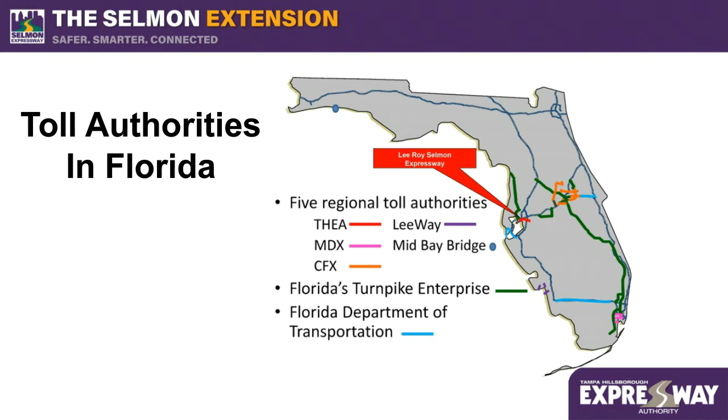So exactly what is THEA, and how are we different from the Turnpike or FDOT? We are an agency of the state created to build and maintain roads in Hillsborough County and any county that borders Hillsborough. Because we are an agency of the state, we have to follow all of the procurement rules and obey the Sunshine Law like any state agency.

We have a local board, so that allows local authority. We have a 7-member board: 4 are appointed by the governor and confirmed by the Senate, 2 are elected by the voters of Hillsborough County, the mayor and a county commissioner, as well as the FDOT district secretary. FDOT and the Turnpike are state agencies with headquarters in Tallahassee.

THEA is financed strictly through the tolls we collect. We receive no tax funding, and the tolls that you pay on the Selmon Expressway stay in Hillsborough County. FDOT and the Turnpike put all of their tolls together and then redistribute them throughout the state.

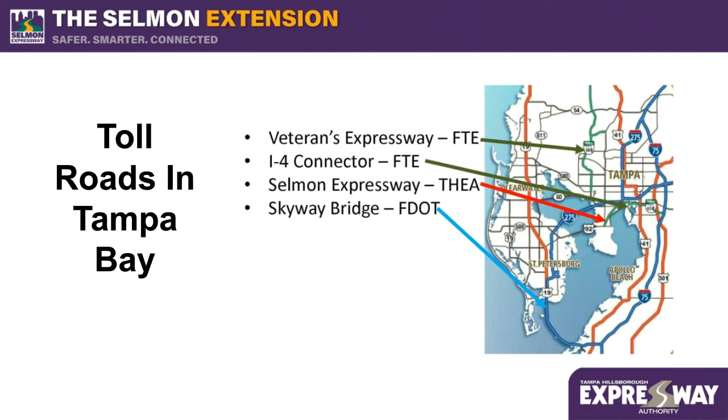THEA owns 4 properties, the primary of which is the Lee Roy Selmon Expressway. It runs for about 15 miles from Brandon to Gandy Boulevard in South Tampa, and with the extension project, we will be adding about 2 more miles.

Brandon Parkway and Meridian Avenue are feeder roads for the internationally award-winning reversible express lanes of the Selmon Expressway. In addition, Brandon Parkway and Meridian Avenue are multimodal, as they have bicycle and pedestrian paths. In fact, I think Meridian Avenue is the best-looking road in downtown Tampa. We also own the Selmon Greenway, a 1.5-mile urban trail, mostly in the shade of the expressway, that runs through downtown Tampa from the Riverwalk on the west to Ybor City on the east.

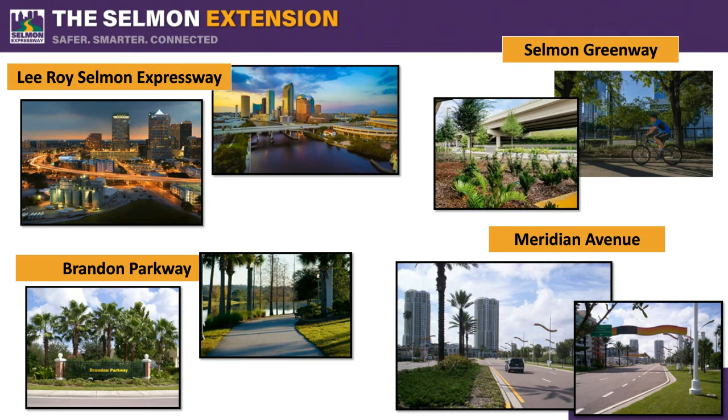As a local authority, we are part of the community, and part of our mission is to give back to that community. Some of the projects you see here are the Swan Avenue Underpass.

We cleaned and painted the walls and pier columns, added a coating that will make it easier to get the graffiti off, and installed a great deal of landscaping, lights, and a bigger sidewalk for pedestrians, strollers, joggers, and bikes to traverse this walkway under the overpass.

We also partner with the city to light the Selmon Expressway over the Hillsborough River. If you've ever been on the Riverwalk at night, you know that those bridges look very cool with their changing lights. Our last public art is right outside our building with our Tampa Play mural by celebrated Tampa artist Bask.

And finally, the Kotfila Memorial Dog Park, honoring a true hero, Deputy John R. Kotfila Jr., who gave his life to save another from a wrong-way driver on the Expressway in 2016.

I just wanted to give you an idea of what the Expressway Authority is and what we do for the community. And now, on to the Selmon Extension.

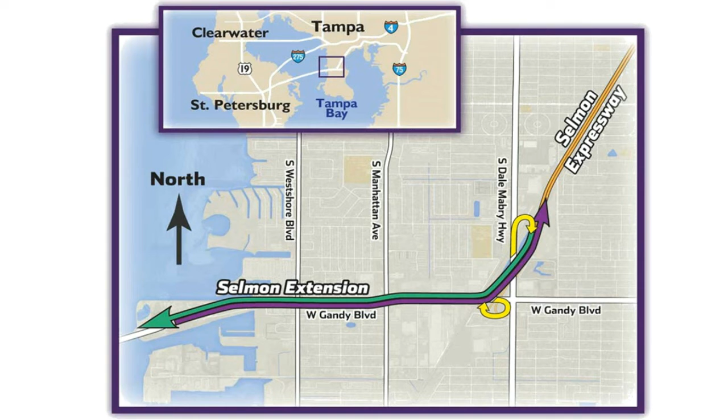Let's talk about some of the details of the project. The bottom of the bridge is 30 feet above the existing road. Typical downtown bridge structures are around 17 feet.

This helps keep the cross-corridor visibility on Gandy Boulevard. In other words, if you're on Gandy Boulevard, you'll be able to see what's on the other side of the street. The turning movements that were on Gandy Boulevard at the start of our project will remain. While we may need to make modifications during construction, the turns that were there when we began will be put back at the end of the project.

The extension is 1 lane in each direction. We estimate that approximately 40% of the traffic on Gandy Boulevard today is regional traffic. That means that we only need 1 lane in each direction to handle that volume.

The construction on Gandy Boulevard is happening totally in the median. While this is great for businesses, we aren't closing any business driveways. It is a tight working space. So please, if you're driving Gandy Boulevard, don't speed and watch out for our workers.

Our contract calls for no lane closures on Gandy Boulevard or the Selmon Expressway during the morning and afternoon rush hours. Typically, the work along Gandy Boulevard is being done at night and on weekends. The work on the interchange is being done during the day.

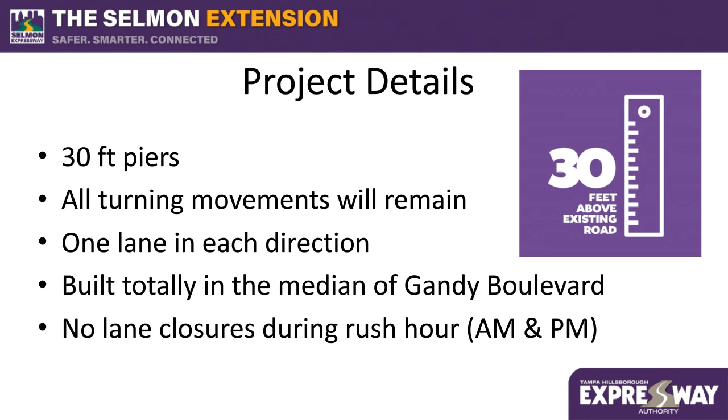The Selmon Extension Project is funded completely by the Expressway Authority. No tax dollars are being used. It is funded with toll revenue and bonds, and our debt is not state debt. The toll collected on the extension will help pay back the bonds, and the cost for the project is expected to be $230 million. The extension project did not acquire any right-of-way. No property purchases were required from any businesses or homes. The toll for the extension will be 94 cents for SunPass account holders.

The immediate community and region will benefit from the increased ability to move goods and people around the Tampa Bay region. The project will provide better travel times and safety in the Gandy corridor, and it will provide a major evacuation enhancement for both South Tampa and Pinellas County families. And all of this is completed without taxpayer dollars.

We put together an animation of the extension, so let's look at that now.

The Selmon Extension is a key component of Tampa Bay's transportation system. The extension will complete the Selmon Expressway's uninterrupted connection from Brandon across Tampa to the Gandy Bridge. The extension will consist of an elevated expressway in the median of Gandy Boulevard, with ramps to enter and exit the extension just east of the Gandy Bridge and at the intersection of Gandy Boulevard and Dale Mabry Highway. Traveling east from St. Petersburg, drivers can choose to stay on Gandy Boulevard for local destinations or enter the extension via the on-ramp to the left.

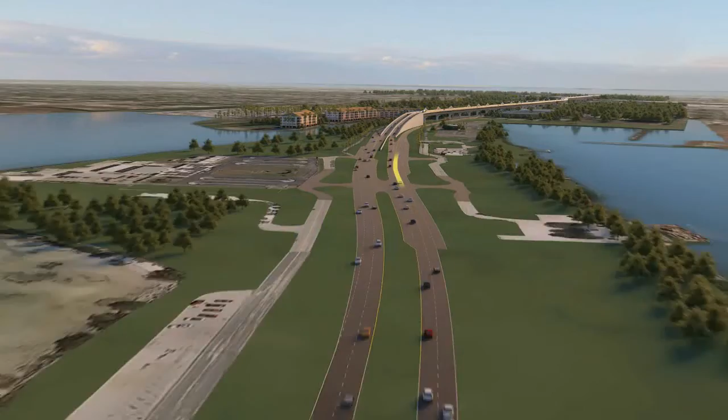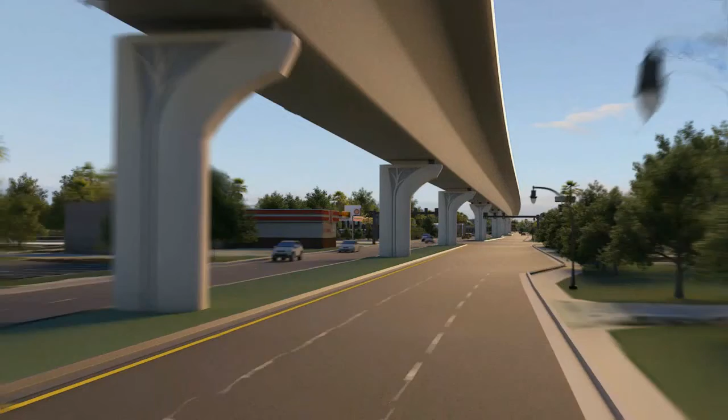Once on the extension, eastbound travelers have the choice to exit at Dale Mabry or continue on to the Selmon Expressway towards downtown Tampa. The bottom of the extension structure is 30 feet high, approximately twice as high as a typical bridge design. This maintains sight lines for businesses and cross streets. When the extension is complete, the current turn lanes will remain as they are today.

Pier design, decorative lighting, and public art opportunities are part of the project. Eastbound travelers along the extension have the choice to exit at Dale Mabry or continue on to the Selmon Expressway. Travelers along Dale Mabry will be able to enter the extension via the ramps just north of the Gandy Boulevard-Dale Mabry intersection. Traveling west on the Selmon Expressway, drivers can choose to use Gandy Boulevard or to continue on to the extension.

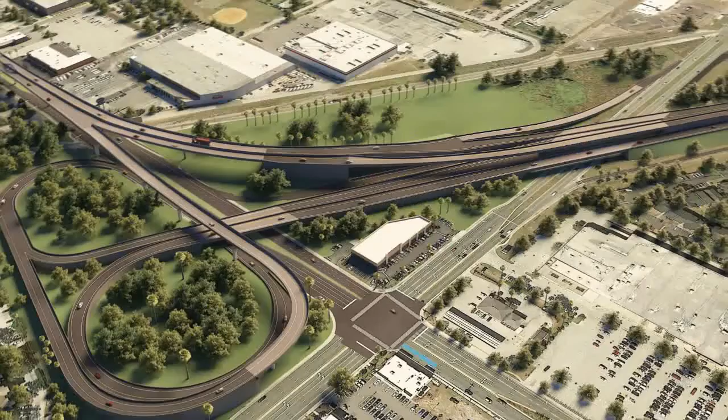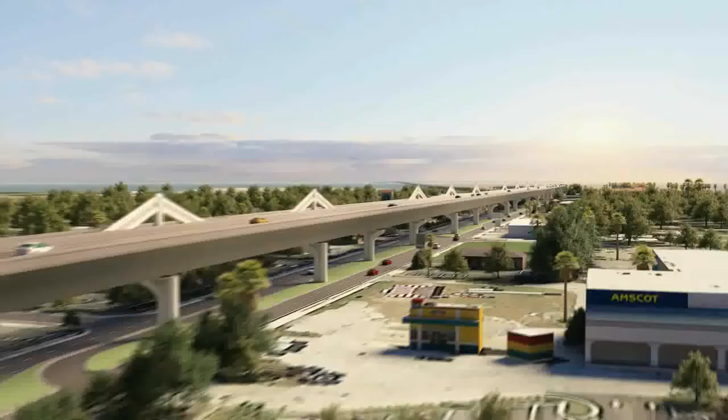Trucks will be allowed on the extension. This will provide a direct route for cargo and a safer experience for drivers on Gandy. The extension will also serve as an evacuation route in case of an emergency.

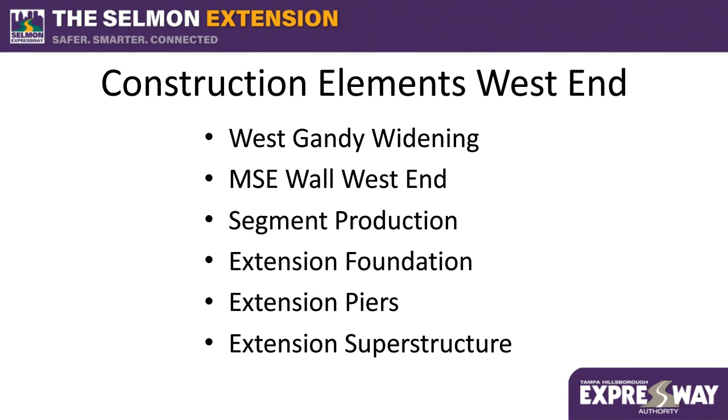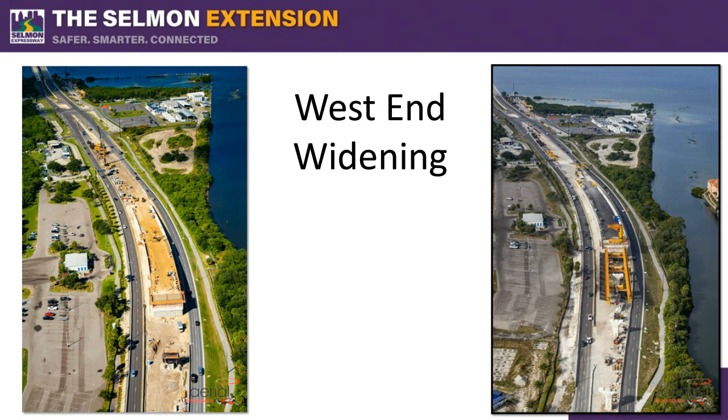We needed to move the lanes farther apart to make room for the extension ramp. At the east end of that ramp is a mechanically stabilized earth wall, or MSE. After the wall, the extension is on structure, or on the piers, until it reaches the Expressway on the east end. At this west end, the crews have finished moving the lanes farther apart to make room for the extension ramp. Final paving and realignment will happen towards the end of the project. And we have also finished that MSE wall at the west end.

As the construction travels along Gandy Boulevard, we will drill for the foundations, then pour the foundations, then piers, and then install the segments, or the superstructure, on top. The superstructure is just another name for the roadway. While all this is going on, we began, and we are continuing, to make segments in our casting yard.

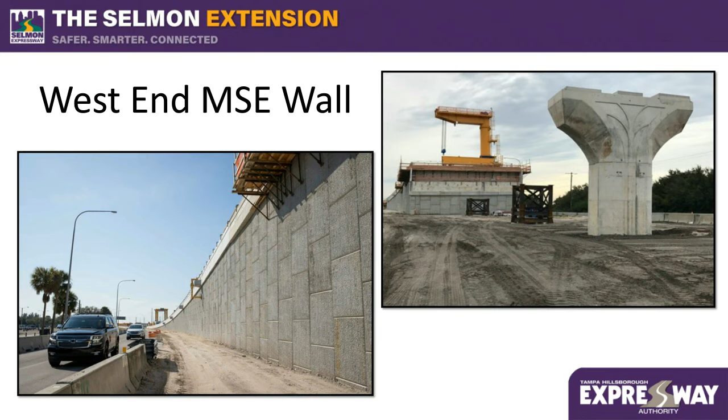Our casting yard has been hard at work getting the segments ready to go. A segment is basically a piece of the roadway on top. We put the pieces together and post-tension them. If you think about the Skyway Bridge and its yellow cables, instead of putting the cables on the outside, we are putting them on the inside of the extension. We will need 744 segments to complete this project, a massive undertaking.

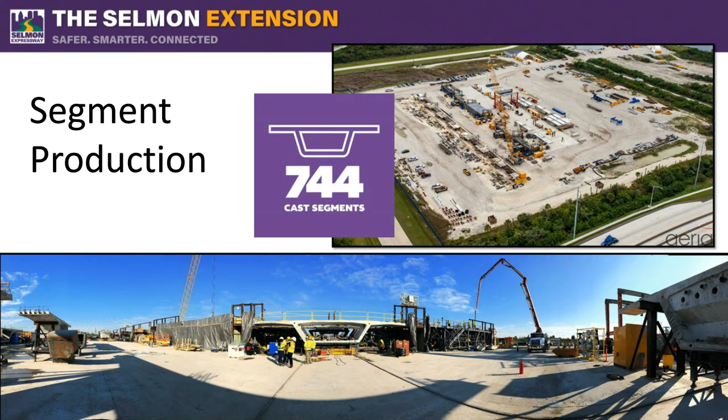Our casting yard is located off Causeway Boulevard in Tampa. You might see a segment being transported along the Selmon Expressway. In total, this project will use over 7,800 tons of rebar, steel. That's including the rebar in the segments, the piers, and the foundations.

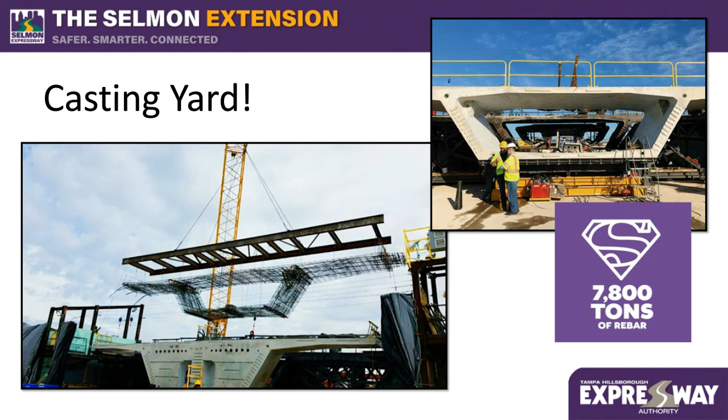With the MSE wall and ramp completed, we are able to set up staging areas for the segments at the west end. The segments are transported from the casting yard and temporarily stored in the open area at the base of the ramp. The segments are then lifted with a special crane and moved to the top of the ramp so they can be placed on the gantry.

The huge yellow crane lifts the segments and places it on the launching gantry. Each segment weighs about 72 tons. That's 144,000 pounds each.

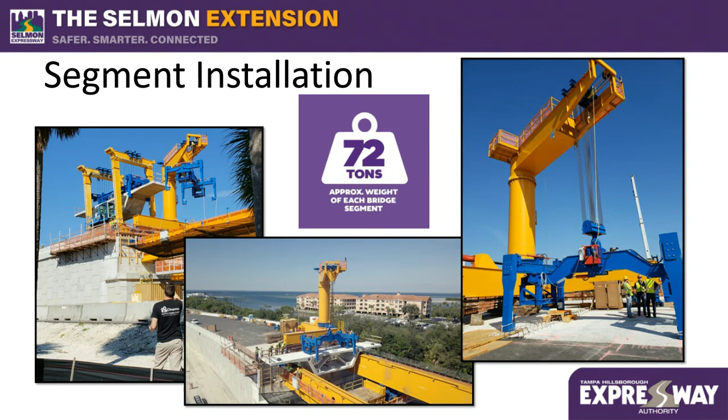The yellow structure that is parallel to the roadway is the launching gantry. The segments are placed on this gantry and then launched or moved along the gantry to a pier. As you can see from the photo on the right, the launching gantry is huge, and there are several piers already up at the west end of the project.

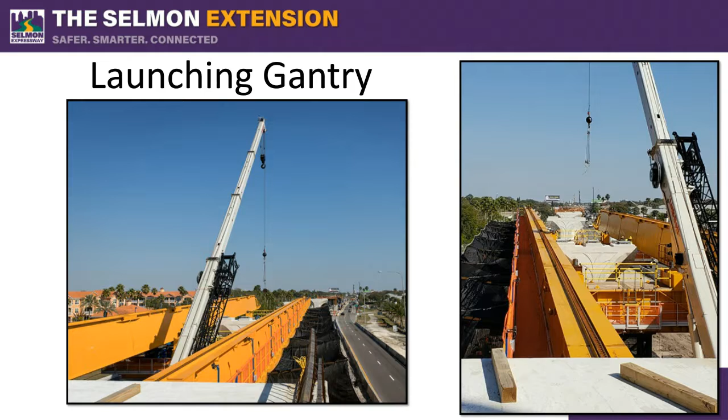The weight of the segments is supported by temporary towers and the gantry system while they are being tensioned together. You'll see these towers along Gandy Boulevard as we move the launching gantry from pier to pier, from west to east.

We recently had a huge milestone happen with the Selmon Extension Project. Here's a quick video of that accomplishment.

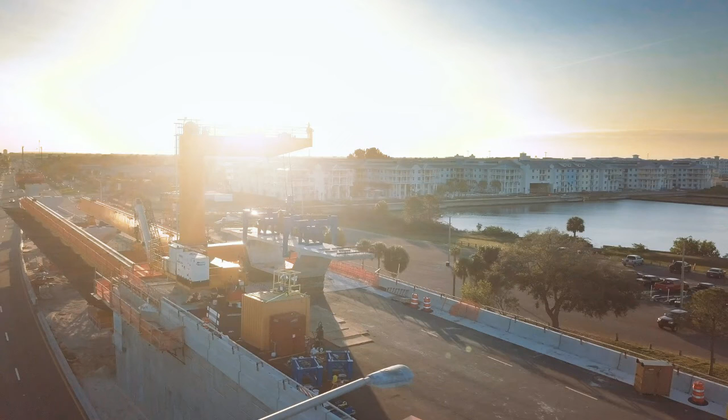Faster and more efficiently, so I think it's really good for our area. What you see behind me is the first segment.

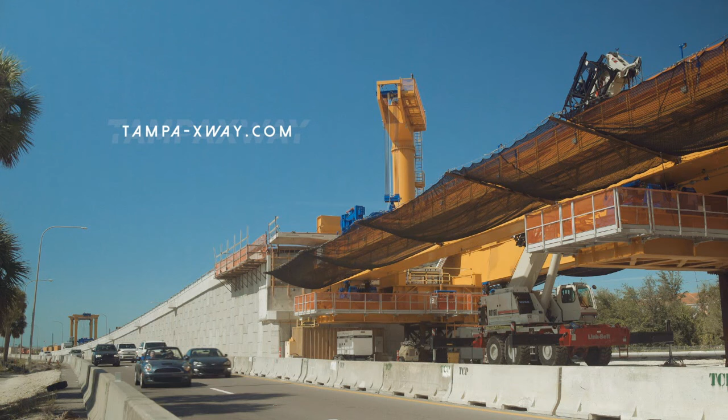Wasn't that a cool little video? We are so excited that we have several segments placed on the launching gantry already and are in the progress of tensioning them together. Once a span of segments has been completed, the gantry system will advance to the next span along with the temporary supports. The extension is really starting to take shape.

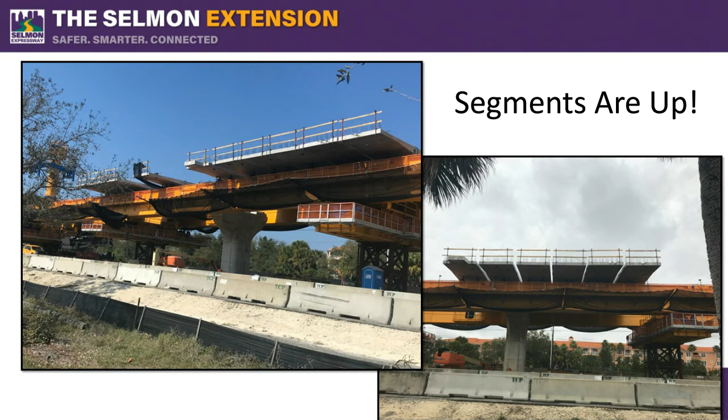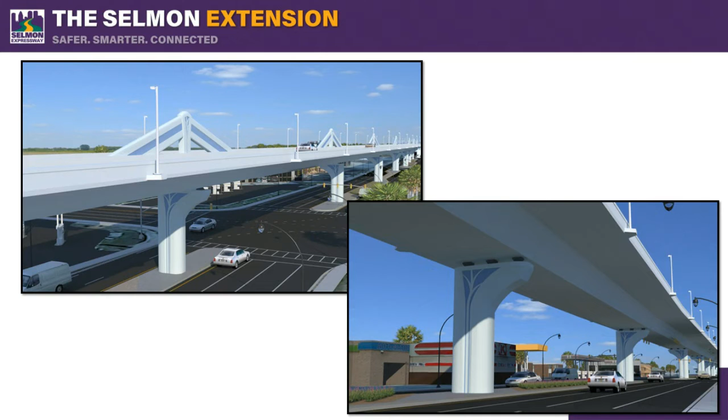Now let's talk about the piers. In October of 2017, we held a public contest for the pier design. The estuary design was the clear winner. These are renderings of that pier design. You can also see these renderings on the website, selmonextension.com. And this is a picture of the pier with the design on it. I think they look exactly like the renderings, and of course the color will come later. We will have 55 piers altogether on this project, a little over 30 on Gandy Boulevard, and the rest in the interchange area.

So that's what's happening on the west end near the bridge. We are still working our way east on Gandy Boulevard. We're drilling, pouring concrete for the foundations and piers, and getting ready to place those segments.

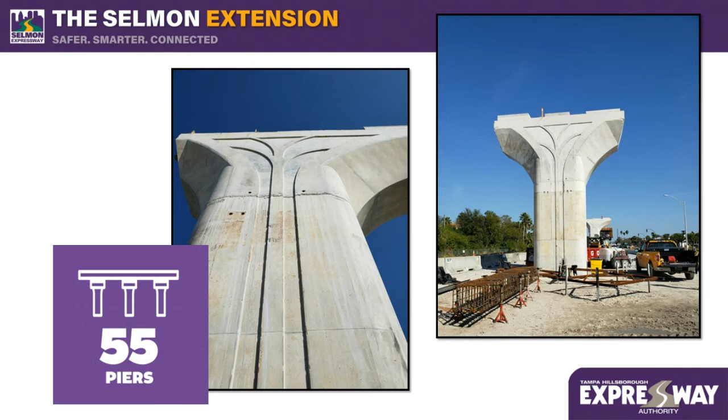Let's talk about the construction that's happening on the east end of the project, or in the interchange of the Selmon Expressway and Gandy Boulevard. We are building new ramps, redoing the ponds, and we're working on the interchange foundations for the piers. As one of the last items, we'll place the tolling equipment in this interchange area.

I know that the animation video went pretty quickly, and the interchange area is where we actually are adding new ramps. So let's talk about each movement that you can make in the interchange. And again, this can all be found on our website, selmonextension.com.

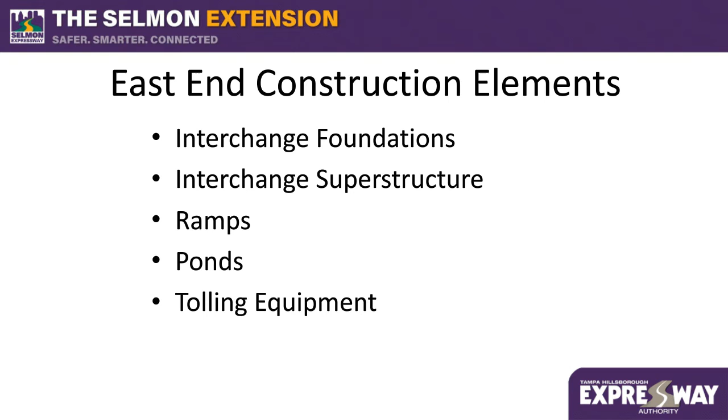If you are coming from St. Petersburg, you will have the option to choose to stay on Gandy Boulevard or take the on-ramp to the extension. If you choose to take the extension and want to continue on the expressway, you'll simply fly over the interchange area and join the expressway just past the Dale Mabry on-ramp.

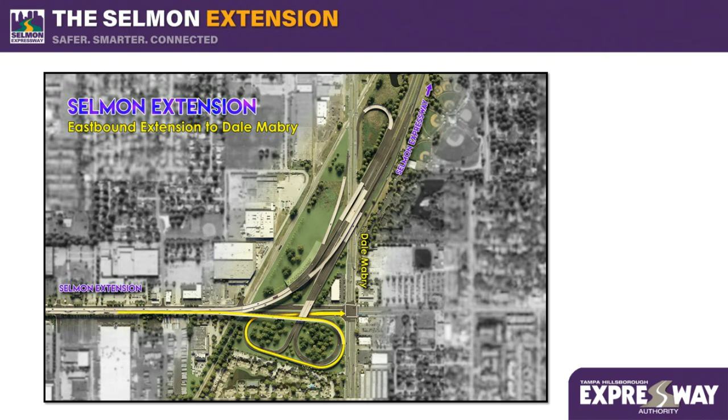Here's an aerial view of the interchange. A total of 6 ramps will be at this interchange when the project is completed. As you can see, the interchange is a complicated project all on its own.

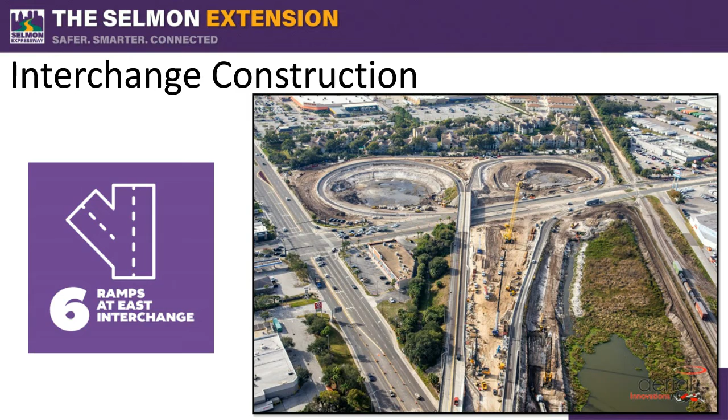We are currently driving concrete piles at the Dale Mabry Interchange for construction of the new ramps. These piles will be driven about 50 feet into the ground for support, and this is a daytime operation. At the west end, I showed you a ramp with a huge MSE wall, remember, mechanically stabilized earth. At this side of the project, there are 8 MSE walls of various sizes being built for the new ramps.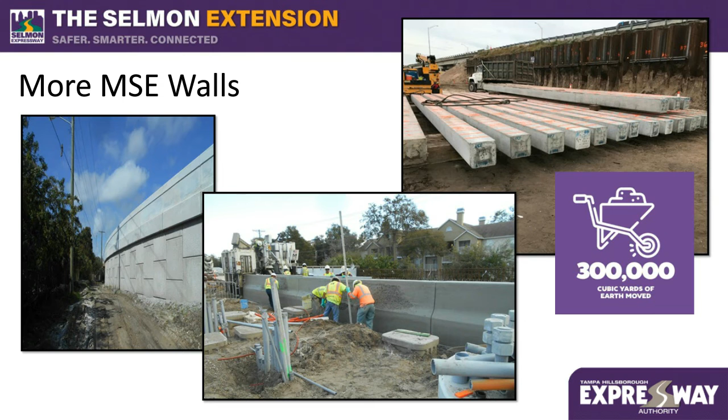All in all, we are moving over 300,000 cubic yards of dirt for this project. The old southbound bridge over Gandy Boulevard has been removed and construction of the new bridge is underway. We are expecting a traffic shift for the off-ramp to westbound Gandy Boulevard by early April. This will make room for a large portion of the remaining work to get started. In addition, we will also be revising the railroad crossing on Gandy Boulevard.

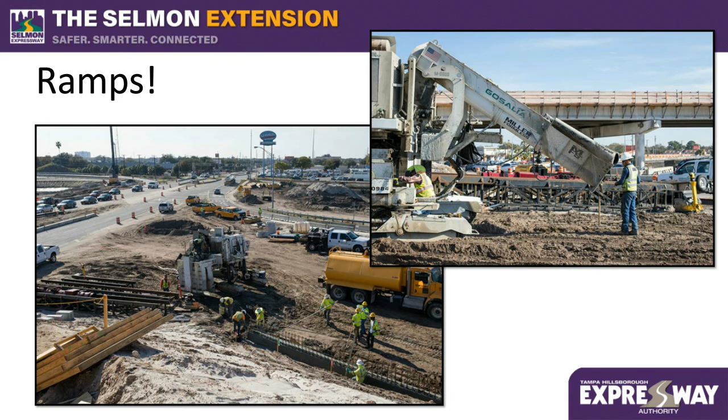So let's put this all together. We started the widening in January of last year and began constructing the MSE wall on the west end around May of 2018. Those elements of the project are complete. While we were working on that, in June of last year, we began drilling and doing soil samplings so that we can begin work on the foundations, followed by the piers, followed by the segments.

We will be working west to east on the foundation, piers, and segments, and that work will take us until the fall of 2020. We've been casting segments for a couple of months, and we have placed our first segments this month. That's the west end.

Meanwhile, at the east end, we began work on the ramps about May of last year and will continue until the summer of 2020. We've been working on the interchange foundations for about 6 months, with that work to be completed around the end of this year. Work began on the ponds last fall and will continue until the summer. Tolling equipment is one of the last items, and it's scheduled to start installation at the end of this year.

As you can see, we are working from both ends of the project. We have to be constrained to the median, and we don't shut down lanes during the AM and PM rush hour. All of this, and we are still on schedule for completing the project in the fall of 2020.

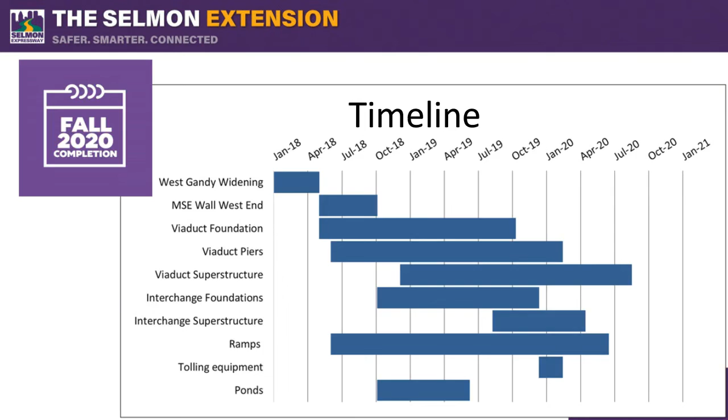The Selmon Extension, built in the middle of Gandy Boulevard, required no homes or businesses to be taken for right-of-way. The bottom of the extension will be 30 feet above the existing road, allowing drivers to see across Gandy Boulevard. All turn lanes that were there at the start of the project will be put back when the project is complete. All lanes of Gandy Boulevard are open during the morning and afternoon rush hours.

Lanes are typically closed from 9 p.m. to 5 a.m. The extension is 1 lane in each direction, enough capacity for 40% of the traffic on Gandy Boulevard that is regional traffic. The cost for the extension is $230 million, paid for by the Expressway Authority through a combination of toll revenue and toll bonds, no tax dollars. The toll on the extension will be 94 cents for SunPass account holders, and the project will be completed by fall of 2020.

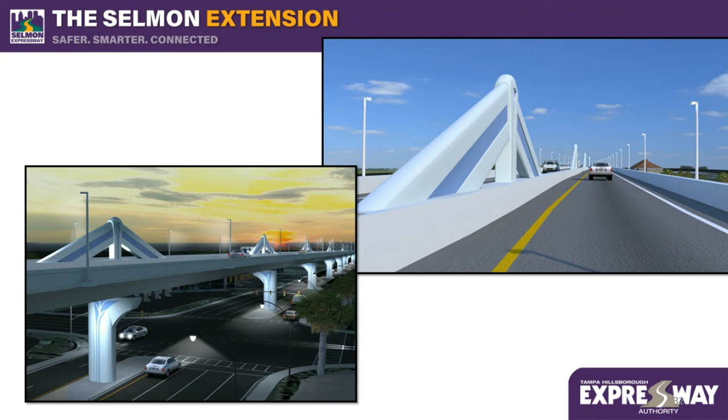Hopefully, with tonight's presentation, you'll understand the extension project and how complicated it is. The construction of the Selmon Extension is going well. We have over 300 workers in the area all along the corridor. If you drive in the construction area, please know that our workers need your attention. Slow down, don't text and drive, and stay alert.

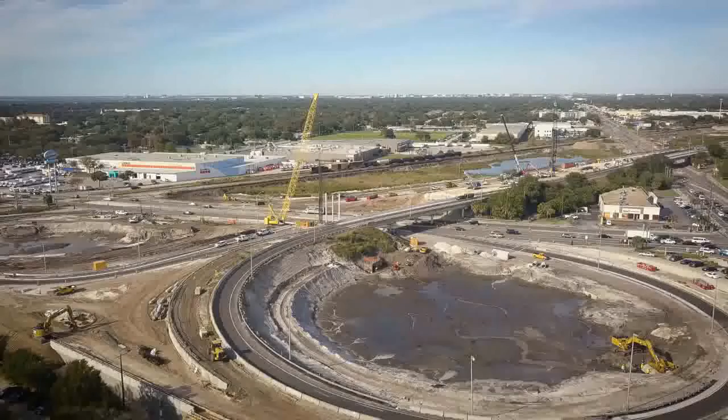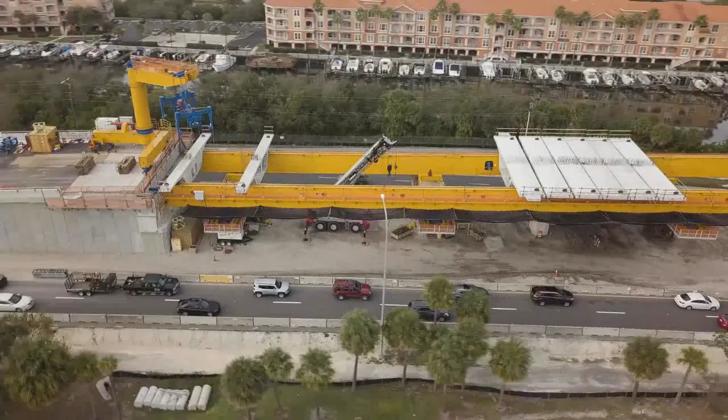The Selmon Extension is a key component of Tampa Bay's transportation system. The extension will complete the Selmon Expressway's uninterrupted connection from Brandon across Tampa to the Gandy Bridge. It will consist of an elevated expressway in the median of Gandy Boulevard, with ramps to enter and exit just east of the Gandy Bridge and at the intersection of Gandy Boulevard and Dale Mabry Highway.

Traveling east from St. Petersburg, drivers can choose to stay on Gandy Boulevard for local destinations or enter the extension via the on-ramp to the left. Once on the extension, eastbound travelers have the choice to exit at Dale Mabry or continue on to the Selmon Expressway towards downtown Tampa.

The bottom of the extension structure is 30 feet high, approximately twice as high as a typical bridge design. This maintains sight lines for businesses and cross streets. When the extension is complete, the current turn lanes will remain as they are today. Pier design, decorative lighting, and public art opportunities are part of the project.

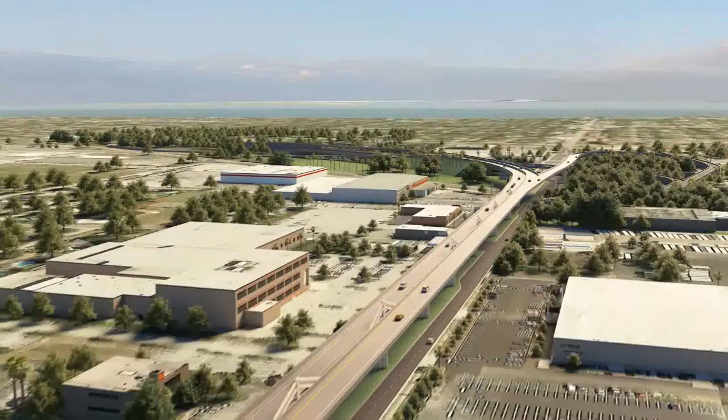Eastbound travelers along the extension have the choice to exit at Dale Mabry or continue on to the Selmon Expressway. Travelers along Dale Mabry will be able to enter the extension via the ramps just north of the Gandy Boulevard-Dale Mabry intersection. Traveling west on the Selmon Expressway, drivers can choose to use Gandy Boulevard or to continue on to the extension.

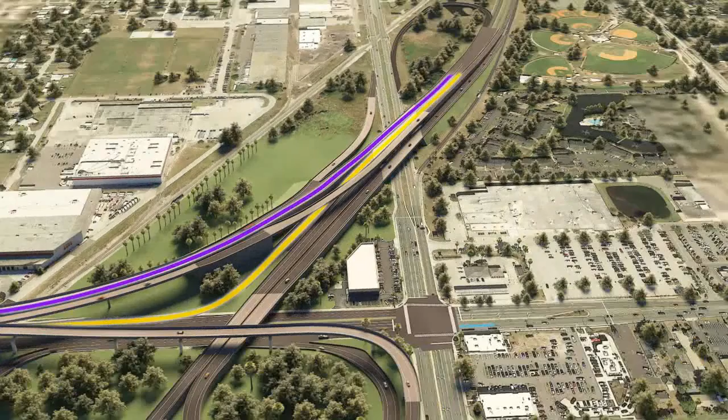Trucks will be allowed on the extension. This will provide a direct route for cargo and a safer experience for drivers on Gandy. The extension will also serve as an evacuation route in case of an emergency.

The Selmon Extension is a key component of Tampa Bay's transportation system. The extension will complete the Selmon Expressway's uninterrupted connection from Brandon across Tampa to the Gandy Bridge. It will consist of an elevated expressway in the median of Gandy Boulevard, with ramps to enter and exit just east of the Gandy Bridge and at the intersection of Gandy Boulevard and Dale Mabry Highway.

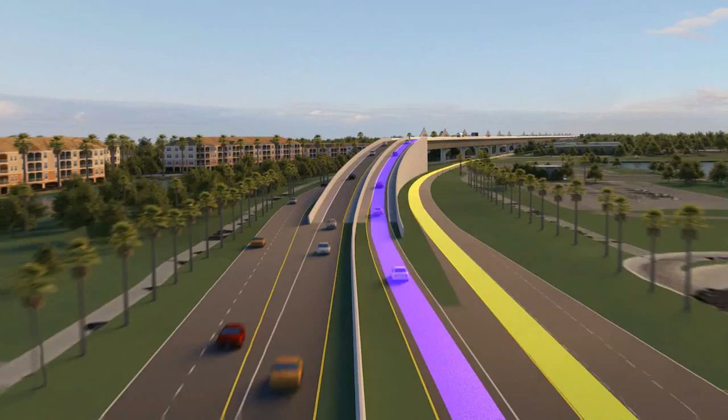Traveling east from St. Petersburg, drivers can choose to stay on Gandy Boulevard for local destinations or enter the extension via the on-ramp to the left. Once on the extension, eastbound travelers have the choice to exit at Dale Mabry or continue on to the Selmon Expressway towards downtown Tampa.

The bottom of the extension structure is 30 feet high, approximately twice as high as a typical bridge design. This maintains sight lines for businesses and cross streets. When the extension is complete, the current turn lanes will remain as they are today. Pier design, decorative lighting, and public art opportunities are part of the project.

Eastbound travelers along the extension have the choice to exit at Dale Mabry or continue on to the Selmon Expressway. Travelers along Dale Mabry will be able to enter the extension via the ramps just north of the Gandy Boulevard-Dale Mabry intersection. Traveling west on the Selmon Expressway, drivers can choose to use Gandy Boulevard or to continue on to the extension.

Trucks will be allowed on the extension. This will provide a direct route for cargo and a safer experience for drivers on Gandy.

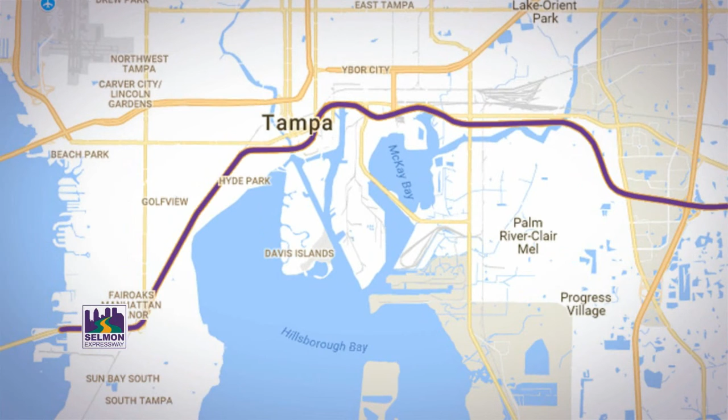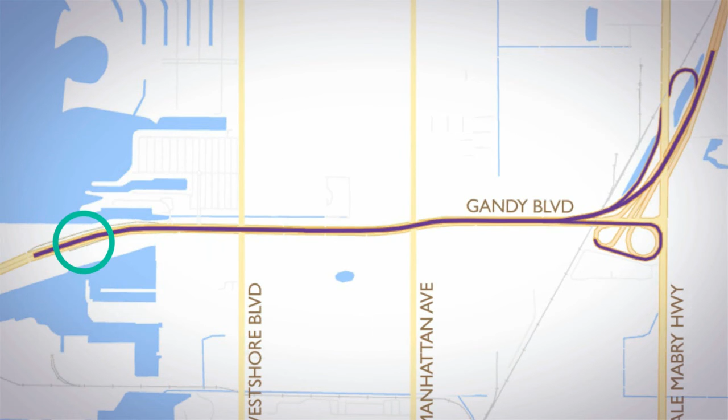The Selmon Extension is a key component of Tampa Bay's transportation system. The extension will complete the Selmon Expressway's uninterrupted connection from Brandon across Tampa to the Gandy Bridge. It will consist of an elevated expressway in the median of Gandy Boulevard, with ramps to enter and exit just east of the Gandy Bridge and at the intersection of Gandy Boulevard and Dale Mabry Highway.

Traveling east from St. Petersburg, drivers can choose to stay on Gandy Boulevard for local destinations or enter the extension via the on-ramp to the left. Once on the extension, eastbound travelers have the choice to exit at Dale Mabry or continue on to the Selmon Expressway towards downtown Tampa.

The bottom of the extension structure is 30 feet high, approximately twice as high as a typical bridge design. This maintains sightlines for businesses and cross streets. When the extension is complete, the current turn lanes will remain as they are today. Pier design, decorative lighting, and public art opportunities are part of the project.

Eastbound travelers along the extension have the choice to exit at Dale Mabry or continue on to the Selmon Expressway. Travelers along Dale Mabry will be able to enter the extension via the ramps just north of the Gandy Boulevard-Dale Mabry intersection. Traveling west on the Selmon Expressway, drivers can choose to use Gandy Boulevard or to continue on to the extension.

Trucks will be allowed on the extension. This will provide a direct route for cargo and a safer experience for drivers on Gandy. The extension will also serve as an evacuation route in case of an emergency.